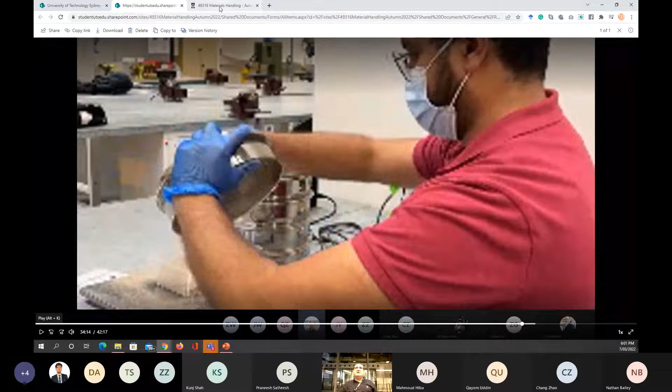Go back to the Canvas page, and I would like you to go to the first - I'm going to make it a student view, so this will show me what you can see. If we go to the modules, and we go back to week number 1, we finish from that.

Week number 2, I mentioned last week that I couldn't find the second half of the recording complete, so I have to use last year's recording. This should work anyway. So we have the lecture divided into 2 halves.

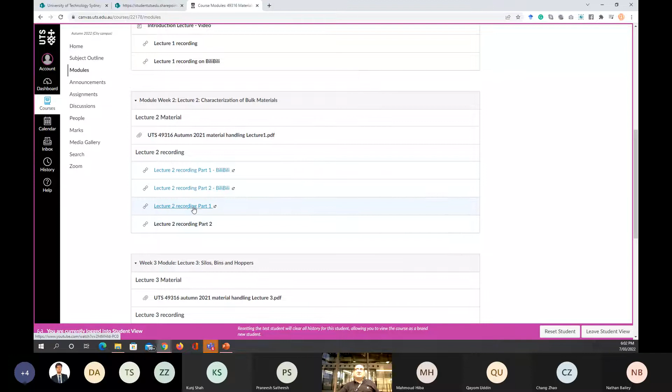I put them on Bilibili, so the students in Asia who have restrictions accessing YouTube can still access the lecture recording. I also have the 2 parts uploaded to YouTube for you. Why I prefer YouTube, not something like just watching through the student SharePoint, is because some students may prefer to watch the lecture on their mobile device, which would be very hard to do otherwise.

Sorry, someone sent me a message. I'll check.

So, session. Okay, so I'm accepting this student to share things.

Okay, now for week number 2, if you check the slides, you will see that we discussed the example for the...

Okay, I can't tell if you can hear me or not, so please just tell me if my voice is clear or not. Can you hear me clearly? Yeah, I've got you.

Okay, so during last week's session, we went through the lecture slides, but we had an example about the sieve test that we learned, or did in the lab today. Following the same example will enable you to do the work, but I'm going to make it much easier by giving you more examples and even an Excel sheet for the process of the same calculation.

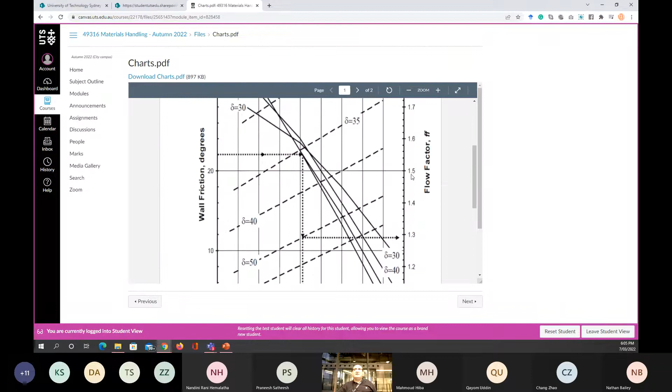Now, week number 3, which is the lecture, has already been available for you since last week, and the recording is going to be available soon. I shared some charts with you, and we're going to use these charts today to do a design procedure for the bins and hoppers, which is something we're going to talk about in today's session.

It's already available in lecture number 3. Assignment number 1 is available for you right now. The Mohr circle example is available here again, to run another session for the students, because I met some students who told me they never used this software before - they used AutoCAD or other software. So again, to repeat the process for them, and everyone is welcome to attend on how to use the software step by step to make the Mohr circle calculation, which is actually not making something, we're just sketching the line.

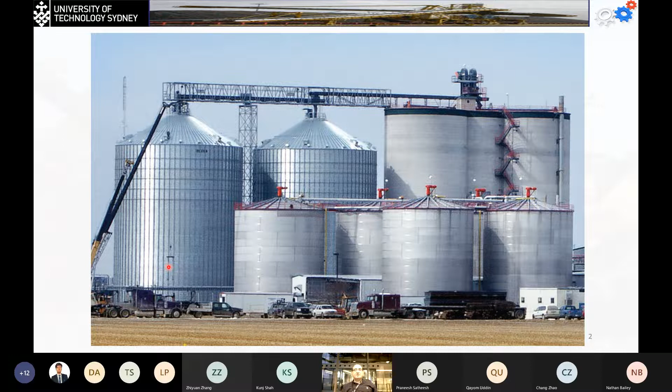In general, we learned last week that we have two types of storage. This can be just outdoor storage, which can be open to the air. Sometimes they put just a cover on top of it to prevent it from drafting. And we have the confined storage, which can be the closed one.

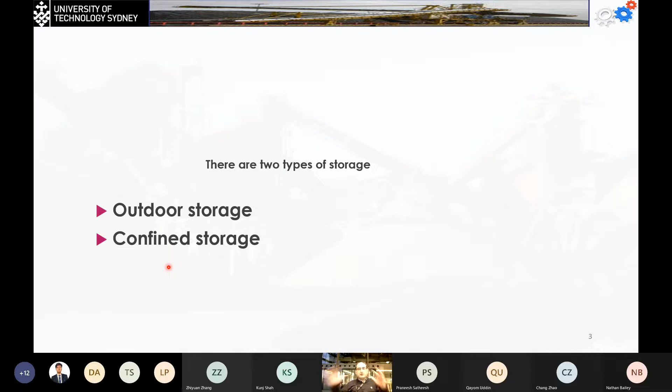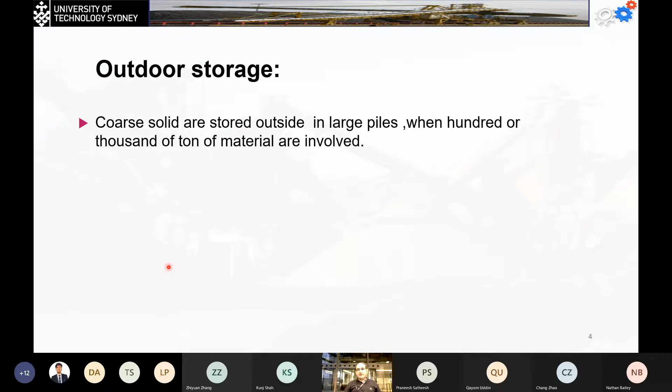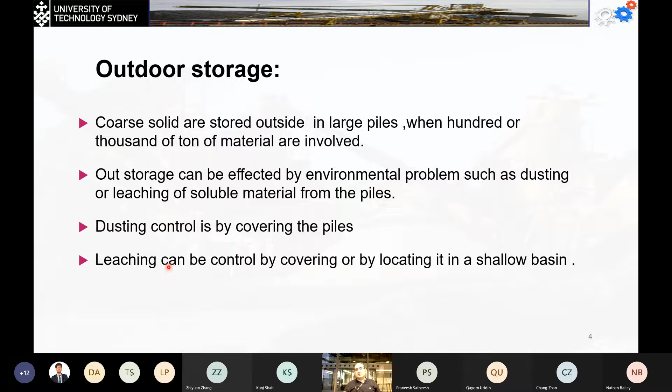Dusting control is done by covering the piles, and this will solve the problem. Leaching can be controlled by covering, or by simply locating it in a shallow basin, so it's not going to flow from the sides.

For some coal storage, you can simply just pile it, and we build a wall on the side, and this will prevent the material from flowing to the outside. The same thing can be done for sand and gravel, because it's not going to be a problem.

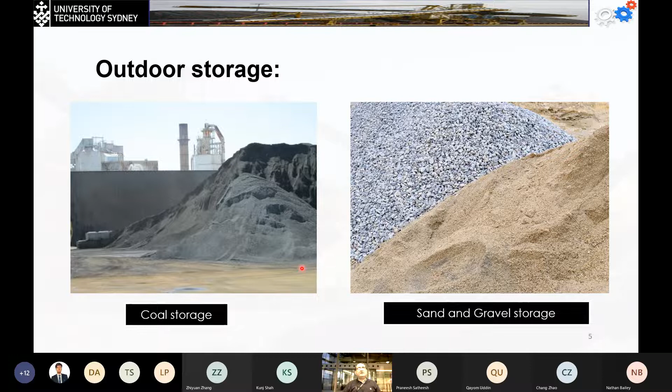Now on the other side, if I'm going to have cement powder, I cannot store it in an open or outdoor storage. In that case, I'm going to use confined storage, and this can have different sizes. The small one is called the bins, the large one is called the silo. But in general, you can see that the silo and the bins are almost the same.

The only difference is that the bins have this device at the bottom, which is called the hopper. The hopper contains the opening at the bottom for emptying the bins or the vertical silo.

Now this is a silo, and we call this one the flat bottom silo. The bottom is going to be flat, but we are going to have something called the moving ground, or usually they call it shaking ground, or live ground. That's going to have multiple screws, and this will ease the process of emptying the flat bottom silos.

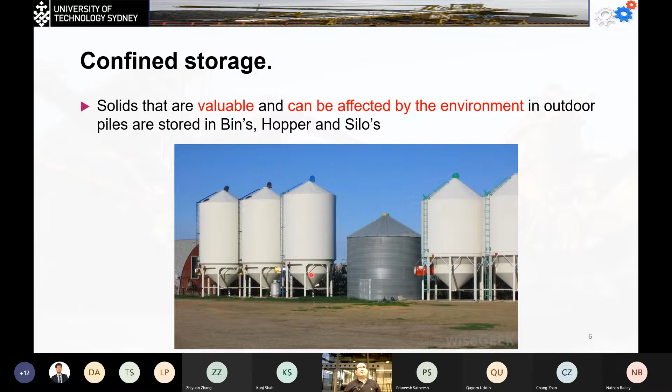You can see we have different types, as storage can come in all shapes and sizes. This one is the square one. The other one we saw was cylindrical, what we call conical hoppers, and we also have the pyramidal shape. We have wedge hoppers, which are long, and at the bottom the two parts connect, with the outlet having a rectangular shape instead of square. We have chisel hoppers, some with transition hoppers, and some with two outlets instead of one.

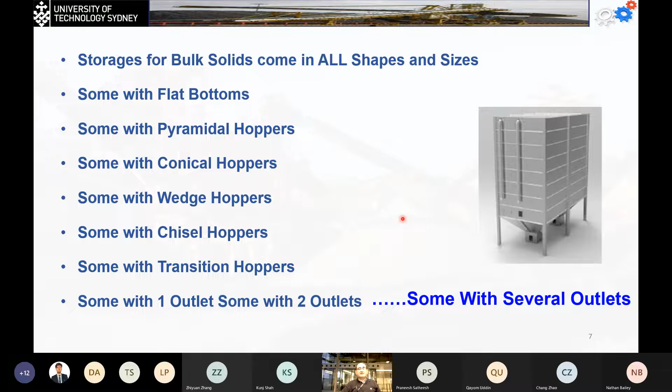Some of them get a single outlet, and I think you saw that in the cement silo or grain silo towed by trucks.

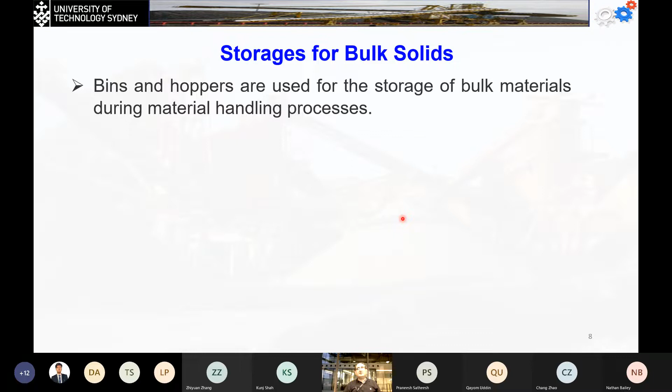Now, storage for bulk materials is very important. We're using bins and hoppers, which are a very common application for storing material as buffer storage during material handling processes. The hopper, as mentioned, is the taper shape or taper section at the bottom of the bin.

This contains the opening. It's always found above the feeders, the device that feeds the process in material handling or manufacturing processes, and it uses gravity to reclaim the stockpiles.

Both bins and hoppers must be designed for the actual bulk materials being handled over the entire range of operating conditions, including varying characteristics. Because if we add material on the first day, by the second day the characteristics will have changed, including the density, since the material will simply be compressed down, changing its density.

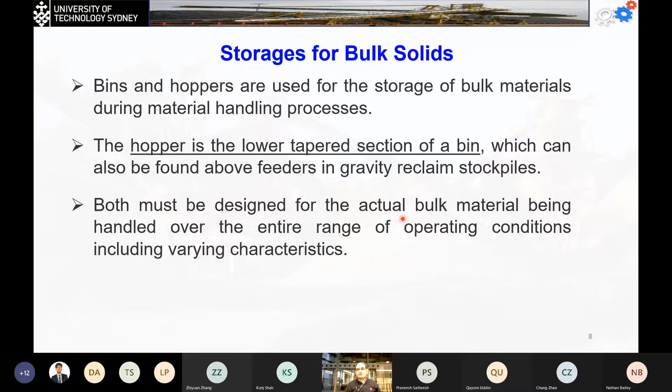Hoppers must be designed so they're easy to load, and that's the easiest part. But the most important thing is they should be designed so they're easy to unload. We don't want to leave any materials inside.

Some of these systems have been designed wrongfully, and this can cause either collapse of the system or the material inside becoming caked, making it impossible to empty or unload from the silo. You end up spending thousands of dollars, and for big silos maybe tens or hundreds of millions of dollars, and then have to leave it because it's no longer useful.

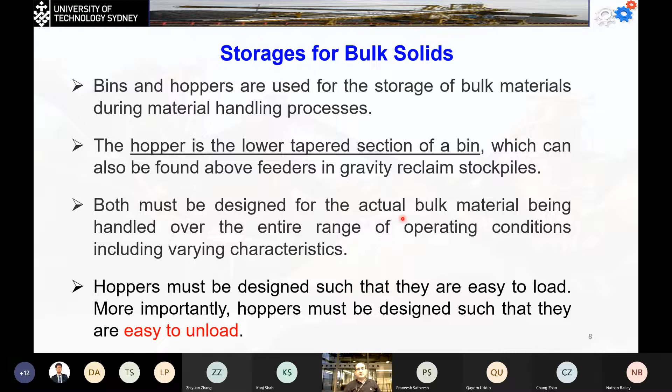Now, silos are something similar to bins, but a larger structure. Usually they have a cylindrical shape and high height, and can store any bulk materials like grain, coal, cement, and food products. The silo is usually tall, relatively small in diameter, which is used for bin storage.

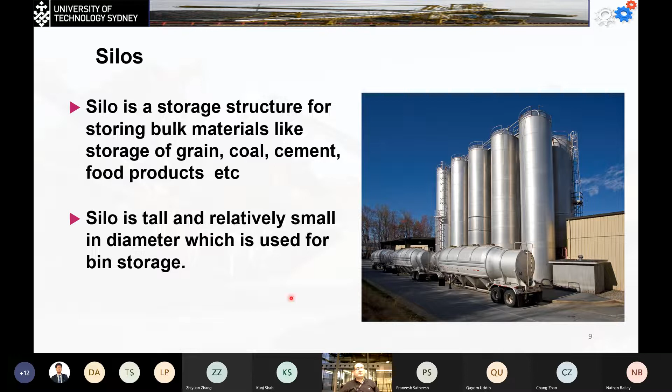Types of silos - the most common one, and I think you saw something similar to this tower silo when you cross the Anzac Bridge, is used for storage of grains, mainly wheat. The structure is made either of concrete or stainless steel.

Some of them are low oxygen tower silos, which is very important to stop fermentation of the material inside. This is very useful in the case of storing grain for a long time. Of course, it's sealed like this one - the concrete has very small porosity, so it allows negative pressure inside the silo.

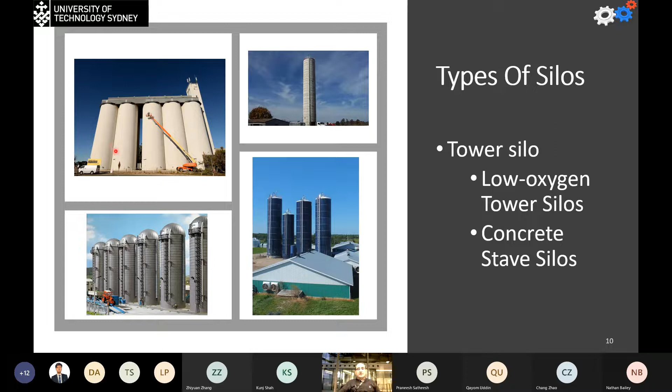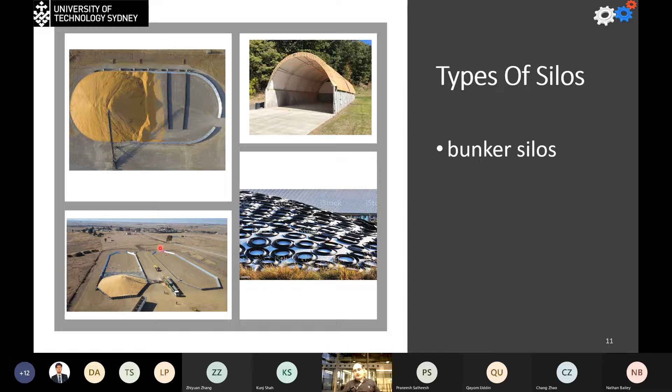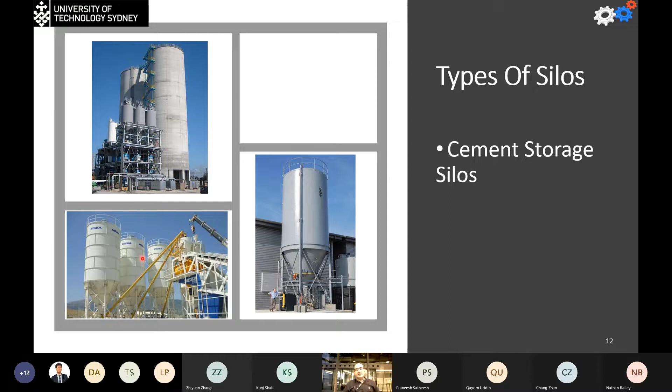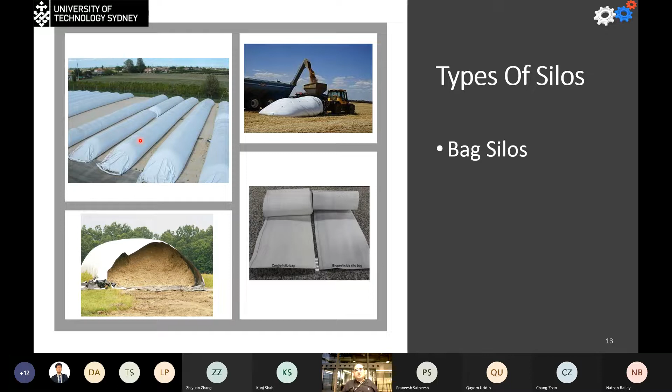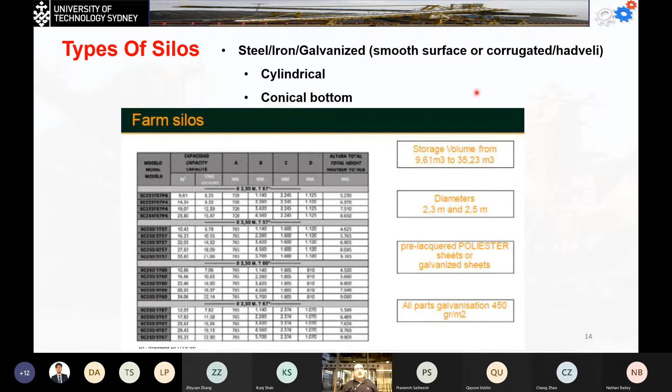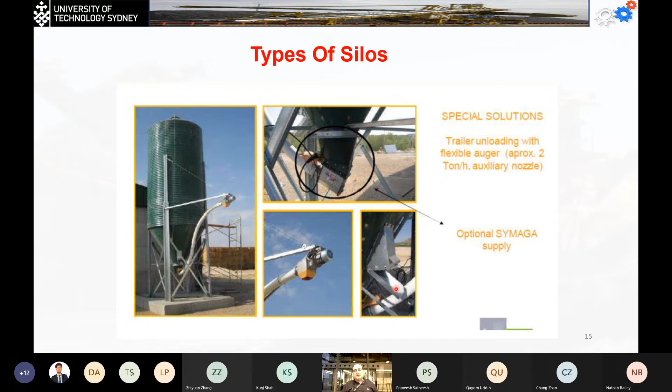We have some special solutions like this equipment, used to fill or empty the silos. Here we have something like a screw, and this screw sends material by the movement of the motor at the top, and it's used to fill the trucks. We usually have a side outlet to relieve pressure, or to use gravity to empty the silo instead of using other types of equipment.

Well, now we have multiple storage systems. What's happening here is that we fill the tanks from one source, and we can empty it from multiple outlets.

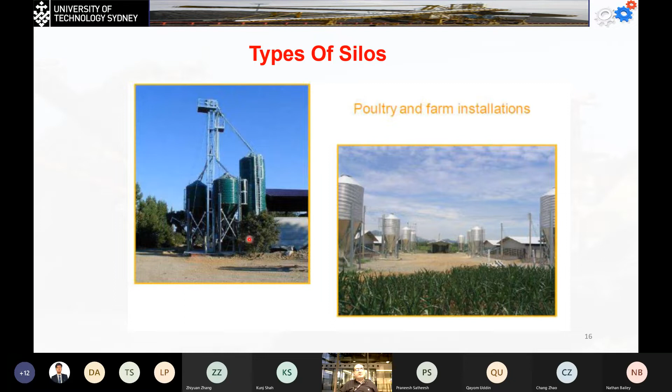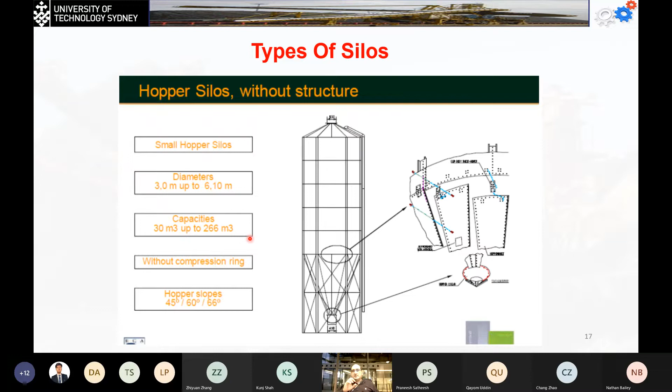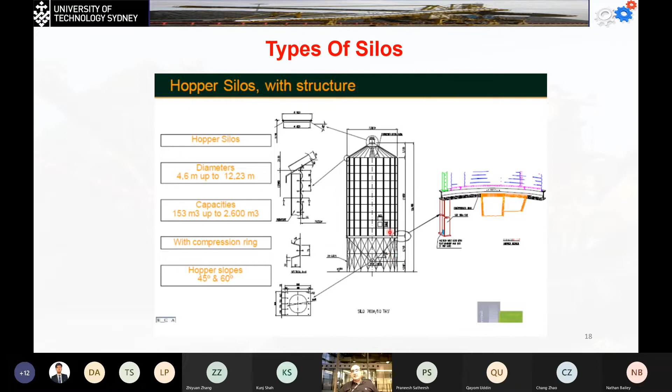What I would like to show you here is software which can help you design the equipment and the silos. It's very important - you select the materials, you select the accessories you're going to use. This can also help you design the structure in case you're not going to have the flat bottom type of silo like this one. This one has a hopper silo with structure on the side to support it, and for larger sizes, we use the platform silo.

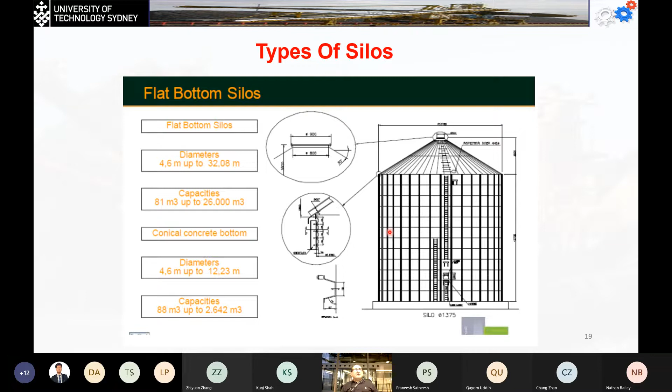The construction of the silo and how they make it - I posted a video on that yesterday on Teams. Usually, they make the sheet first, galvanized, so they don't rust, and then they start to build the silo.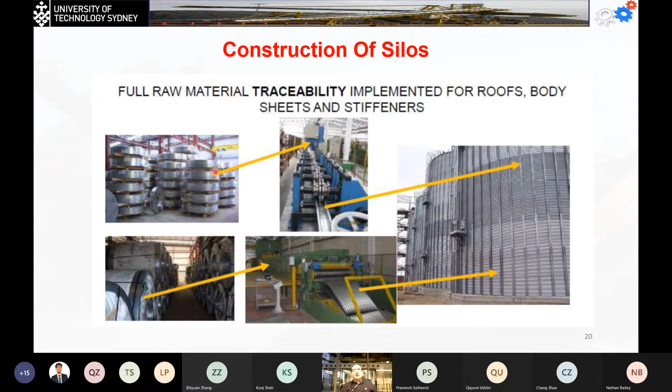Building the silo process starts with installation of the roof first, assembly of the roof, and then they take it up step by step - take it up and add another layer, take it up and another layer, until we reach the required height. It's similar to how they install a crane - you make the T section at the top first, and the control room is on the floor at the beginning. They lift it up and put the lower structure, take it up to another height until reaching the final height.

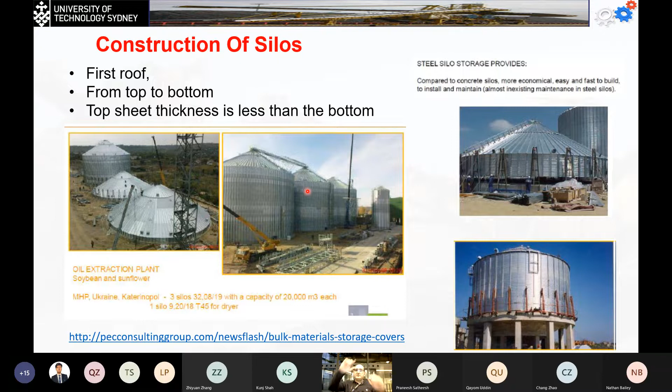Now we go to the bin storage once again.

These are temporary storages. This type of storage is used for shorter periods of time, and it's used to feed an operation or feed a process. For example, this can be connected to feed the medication mixture to the packing system.

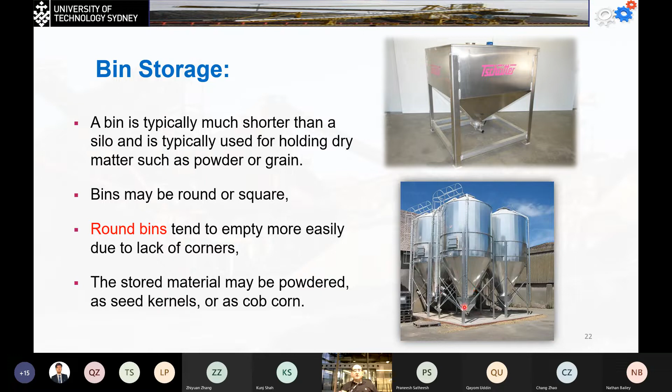Now, when we talk about the bin, that's the bin at the top. The part below is what we call the hopper. The hopper is the small vessel at the bottom with a sloping bottom for temporary storage before feeding the material to the process. The hopper can have different shapes, a conical one, and this cylindrical type. For the opening, it's going to have a height and length, and we're going to learn the design of this type of outlet in today's session.

So it's as easy as feeding from the top and emptying from the bottom. The hopper can be vibrated to encourage the flow. Hoppers can be used individually with no need for a bin at the top. If we have a bin at the top, that's when we use it for storage. But if we use it as a hopper alone, it's temporary storage, and it's used to feed the material to the processes.

The angle of the sloping sides usually needs to be more than the angle of repose for the material we have. Otherwise, if it's less, the material will get stuck. So what we do is increase this angle, which encourages the material to flow with gravity. Otherwise, if it's too flat because the angle is too low, the material will stick at the top. The design of the opening will differ from one material to another, and of course it will be larger if we need a longer storage time.

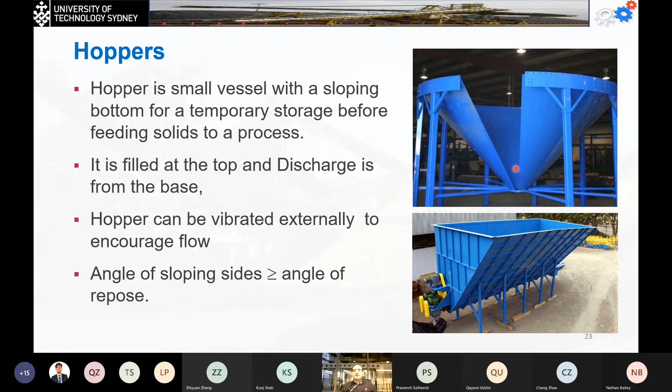So I think we've finished section number one of today's lecture. I will move on to the next stage, which is the hopper design and the hopper design background first.

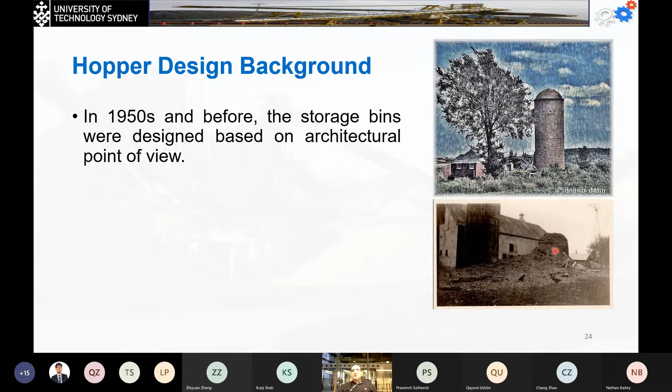So I think if you went to some areas around New South Wales, for example, or the countryside, you saw something like these small towers. These were the old bins that were used by farmers in agriculture. Before 1950, the design of bins and hoppers was done by architectural shape. They used to make it nice looking, but nobody thought about how to make it more efficient. The result was what we see in the photo below. Due to the wrong design, things were collapsing.

So once again, Jenike developed the theory and methods to apply for the design process. Yes, the same person who developed the process for testing the internal shear for the material, and the shear between the material and the walls that we learned in the lab today. He simply related the material stored to the design of the bins, hoppers, and silos. He set the equations and measurements for the particle properties, and made many charts and tables which can be used for the design procedure.

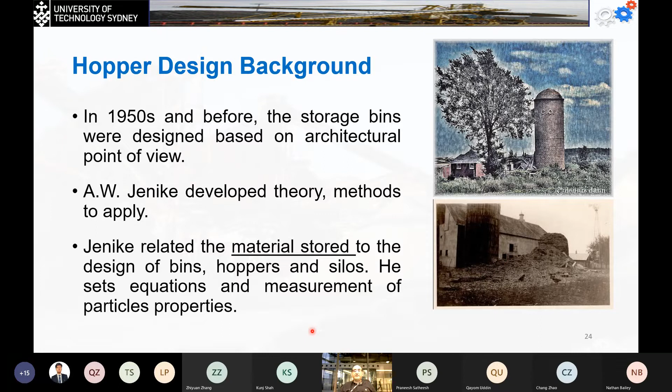Once again, this is another example of the old design. They just wanted to have a nice shape, but they didn't have the real calculation for the process.

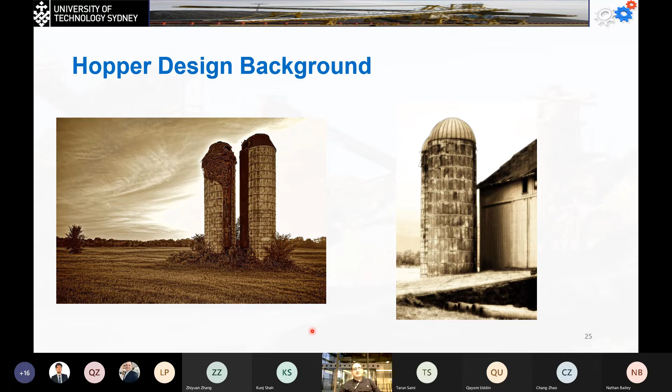So the questions set by Karl Jacob on the design procedure for the bins and hoppers were: first, what is the appropriate flow mode we need? Remember we have basically different types of flow modes, which we discussed last week, and we're going to look at that next.

Also, what hopper angle do we need? I think we have the answers for that now. The answer for the first one should be mass flow. Mass flow means the whole material inside the hopper is going to move at the same time, giving us a constant emptying rate for the hopper.

For the hopper angle, we said this should be more than the angle of repose of the material. But you'll find out that actually the angle of repose is rarely used in the design procedure for the bins and hoppers.

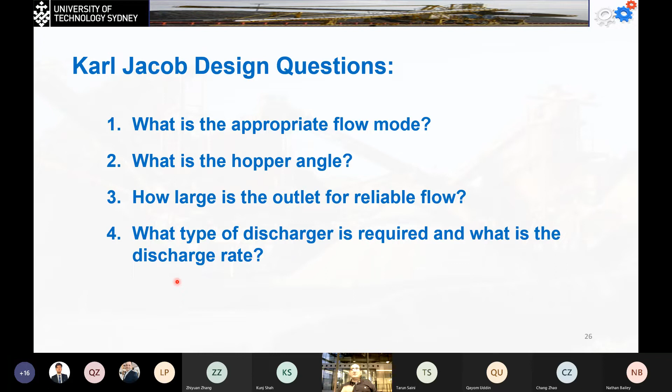Now, the other question is how large the outlet should be for reliable flow. That's what we're going to learn today: how to calculate the minimum diameter and the equivalent dimension. We're going to look at the rectangular outlet for the bin outlet, what type of discharge is required, and what discharge rate you're going to need. So we'll answer all these questions in the following pages.

Once again, if we design the hopper without consideration of the actual material being handled, we're going to have a real problem. I cannot design a hopper to store wheat and then use it to store sand, for example. Now, even if I have whole wheat, maybe I can use it for barley, because it has almost the same characteristics. But I cannot use it for broken wheat, because that's going to be totally different.

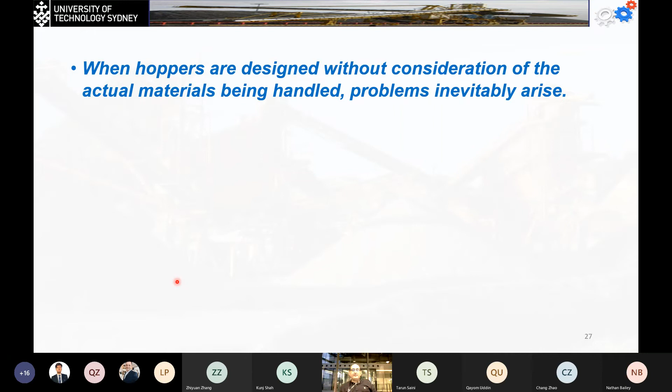The material is going to have interlocking properties that change the flow pattern. So for many materials, the flow problem can be eliminated if we ensure that the mass flow pattern exists in the vessel.

The mass flow pattern, once again just to remind you, is like imagining we have a plastic water bottle, and I flip it on its back and the cap is open. The whole level is going to go down at the same time because it's a fluid.

Now try to do the same thing: get a plastic bottle, put some rice in it, flip it, and see if the material flows at a constant rate, or if some material slows down on the side. If the whole system goes down at the same time, this is good. But if the material moves just in the middle and there's stagnation on the side, this is a problem.

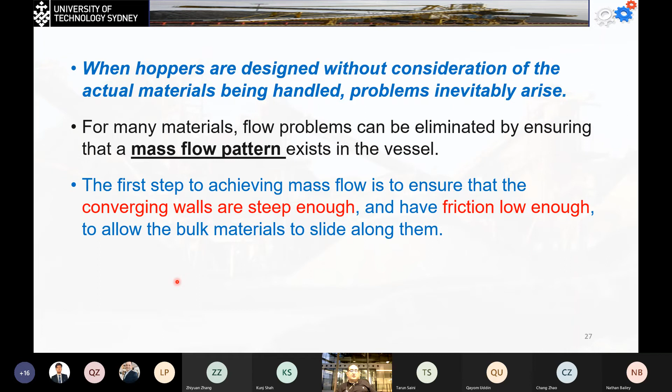So the first step to achieving mass flow is to ensure that the converging walls are steep enough and have low friction with the materials. This allows the bulk materials to slide along them without serious resistance. This should be done first by testing the material to measure the wall friction with the material, and then calculating the minimum hopper angle that will allow mass flow.

That's what we learned today. We learned about the wall friction of the material, the internal material friction, and the wall friction of the material. In today's examples, we're going to learn how to calculate the minimum hopper angle and also the outlet diameters.

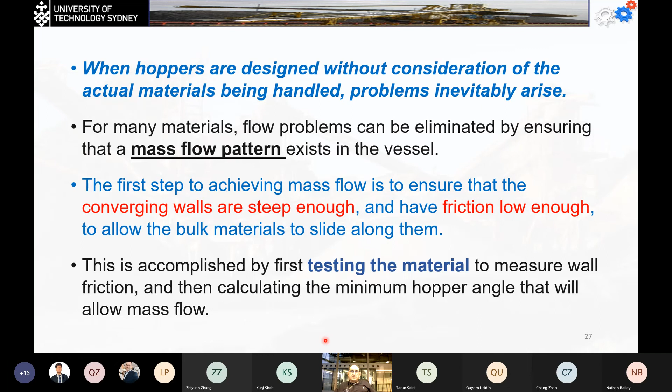So let's have a look at the different types of hopper flow modes. The main three modes of flow are the mass flow I just described, the funnel flow, and the expanded flow. Let's have a look at the three different types.

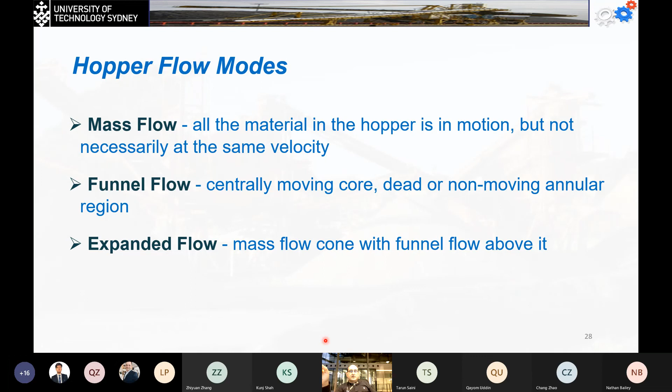So the first one on the left is the desirable one. We're always looking for the mass flow. You can see that in mass flow, the material at any position in this solid system is moving at the same time—no slowing down, no sticking happening on the side.

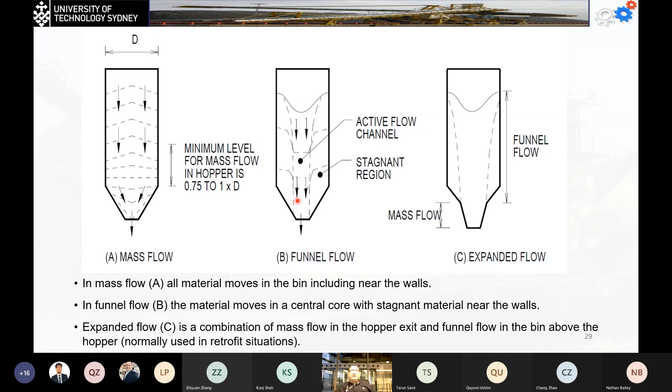Now for the funnel flow, because in funnel flow we only have movement of the materials in the center. So the center is going down.